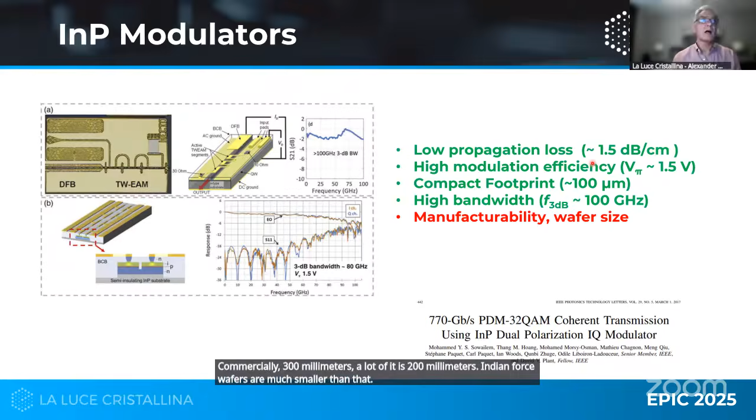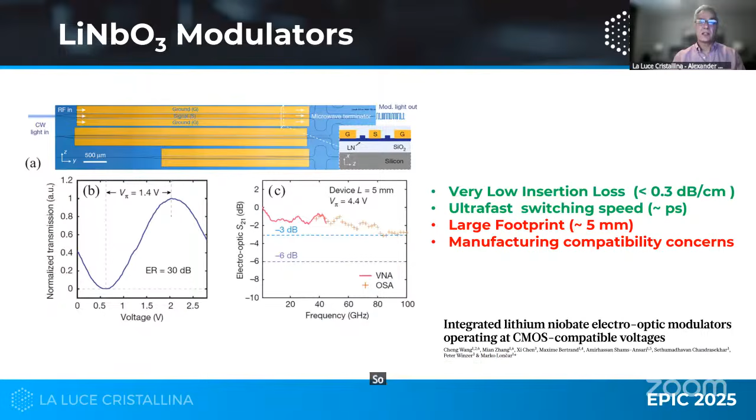Now, the issues are the devices are fairly large, and we'll talk about why. But to me the biggest concern is manufacturing compatibility. It's not so much lithium niobate, it's lithium oxide—lithium oxide is extremely volatile. At room temperature it gives significant vapor pressure, and if you bring this to a silicon fab you contaminate everything, since lithium is a known contaminant in silicon process. So it's a concern—you have to build an entire separate infrastructure.

Among all kinds of modulators, I'll focus on those which do clean phase modulation, essentially phase shifters in various forms that use the Pockels effect. I will not talk about polymers, but I'll talk about lithium niobate and barium titanate. PZT is another option, but PZT has lead, so that's a no-no.

The reason these materials are popular is because of the high data rate they offer and low energy of switching, allowing a low energy solution which is attractive for data centers.

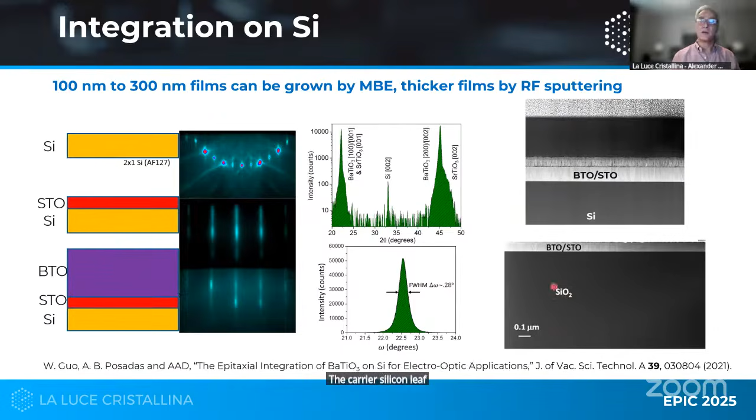And then there's a version of that where you actually don't have any silicon between the barium titanate and the box of the SOI wafer. The carrier silicon wafer below is out of the field of view. So these are thin films.

Now if you look and compare the thin films of lithium niobate and barium titanate, let's take the A-axis variety—that's the long axis in the plane. Lithium niobate gives you a single domain structure, and the data came from the Leuthold group at ETH. Barium titanate is more complicated—it has domains, it can grow in two orthogonal orientations. You see there dark green and light green; they are the same crystal structure, except the long axis is at 90 degrees.

If you look at the dielectric tensor in lithium niobate, it's extremely stable at frequency, no change. In barium titanate, there is change, so it rolls off. If you look at the electro-optic coefficient, it's quite the same thing: in lithium niobate it essentially does not change, it's a modest value here—in thin film it's below 30 for R33.

In barium titanate, being a thin film, you don't get 1,300—you get something smaller, and then it rolls off. But actually it's still large—it's still over 200 when you go to very high frequency.

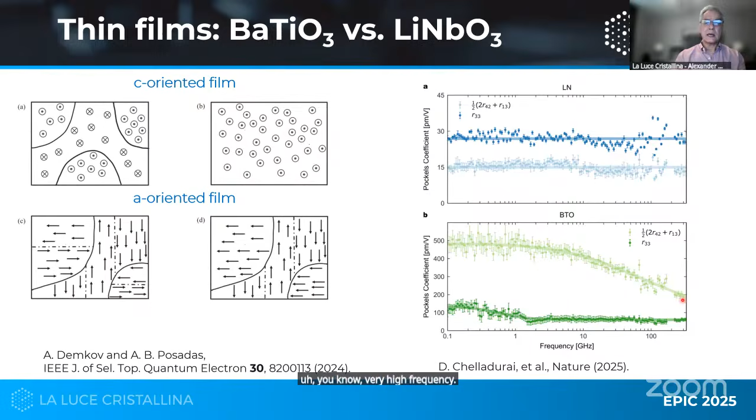Let's see what devices look like. La Luce Cristallina doesn't make devices ourselves—we collaborate. This was a collaboration with Professor Wasserman at UT Austin, and he built both ring resonators and Mach-Zehnder interferometers. So there's a picture of the Mach-Zehnder, and here's a picture of the ring resonator.

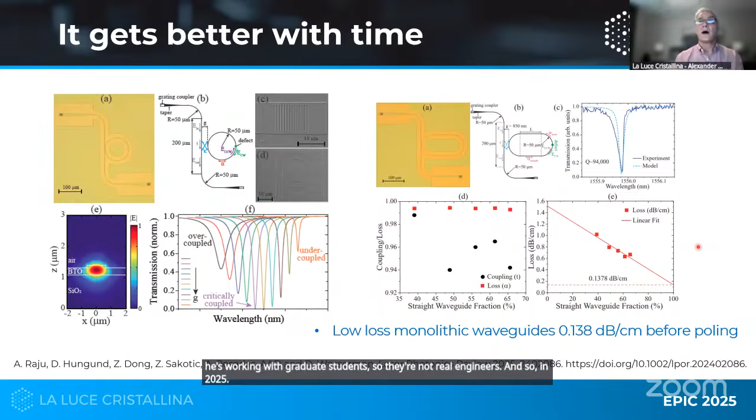They showed a fairly low loss in the waveguide—this is just a straight waveguide loss obtained by a cutback measurement right here, where you make different waveguides of different lengths and plot that. They were able to get the resonator with a Q of 10 to the 5th, which is not bad. This was 2023, but there's rapid progress—remember, he's working with graduate students, so they're not real engineers. In 2025, they used racetrack resonators, and this is the ring resonator.

They were able to extract the linear loss in the straight part of the racetrack on the order of 0.14 decibel per centimeter. This is really fantastic, and that's before poling—none of this barium titanate is poled. Lithium niobate is always poled before, at the wafer level, before you bond it to a substrate.

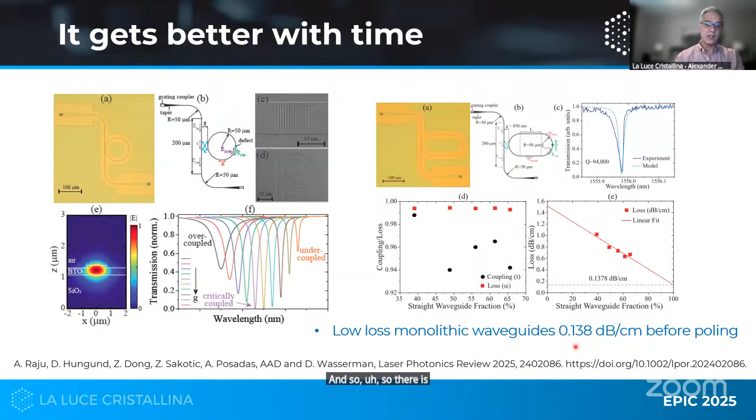So there is rapid progress. We're not the only people who work on that. This is data from IBM, and they reported Q of 10 to the 5th and loss of 0.8 decibel.

This is data from a company called Phase Sensitive. They did a very interesting experiment: they made a 3.5 centimeter long waveguide, sent light in, and waited for it to come back. So the effective travel length is 7 centimeters—not millimeters, not microns, 7 centimeters. And they measured the loss of 0.7 dB.

And then this is the work on the right from University of Illinois in Champaign-Urbana. They actually made the record Q of 1 million resonator, and they extracted the loss of 0.3.

What is behind this? If you look at the old literature, for example the old IBM papers, the loss is much, much higher, on the order of 40 dB. So what's the difference? All of this data is in the monolithic barium titanate—nobody put silicon or silicon nitride and etched that. Guiding is done in barium titanate proper, and most of them are done in barium titanate grown on large wafers.

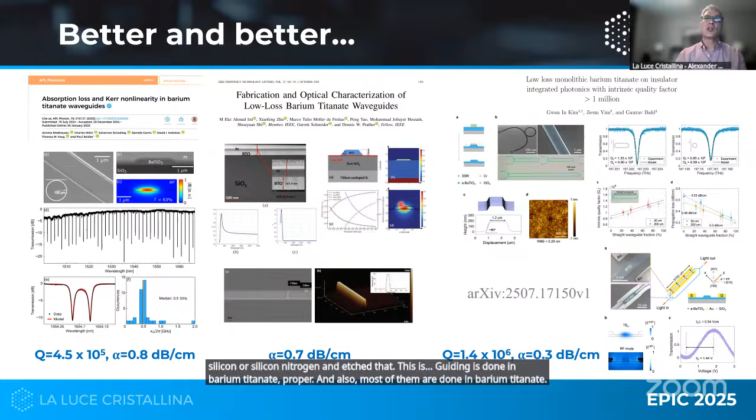And we have just started as a company manufacturing barium titanate on a 200 millimeter wafer. Probably my time is up, so I will stop here. Thank you very much for your attention, and I will be happy to answer all the questions.

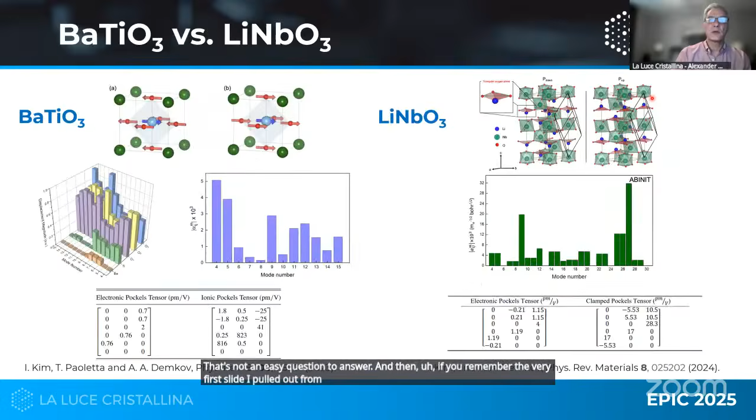If you remember the very first slide I pulled from Richard Soref's review, let me go back to it—this isn't my assessment, it's theirs. Right here you see that barium titanate is possible to integrate with CMOS; it's fully compatible with CMOS, nothing is volatile, nothing contaminates. And in terms of power and area and all of that, it's good in principle. But it's a new technology and not much is known. So what we'd like is to make friends with people who are willing to try and make devices, because most devices you hear about are probably made by universities.

So there are two companies that we're aware of. One is Lumiphase, they're working on a PIC. And then there is PsiQuantum, which is working on quantum computing. They are not publishing much data on their devices.

So we are looking for people to partner with in various forms so we can push barium titanate technology forward, because it requires processing capabilities, it requires device capabilities. And there are two ways of using the material. We think the best one is to make everything in barium titanate proper. But of course, people already have working architecture, so you want to use barium titanate in the area on the chip where you want it.

And for that, you can either do wafer-to-wafer bonding or die-to-wafer bonding. So we're looking for partners in that, and we hope that we can find these partners in the EPIC ecosphere.

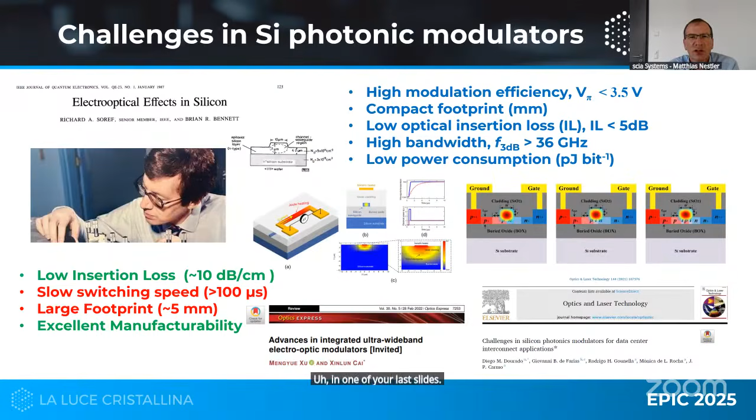Yes, hello. Alex, thank you for the nice overview of the new material, it's very exciting. In one of your last slides, you showed the position of barium titanate on a 300 millimeter wafer, and you mentioned an excellent uniformity of 3%. My question is, is there an advantage if you would further decrease this value to lower than 3%, for device yield or any other properties?

Well, certainly. I mean, silicon wafers proper have probably higher uniformity than this. So I think what happens essentially, if you look at this wafer, it's slightly different color at the edge and in the center, so there's some kind of radial distribution. Also, you can see that the center is somewhat different from the edges. So of course it will benefit, but this must be good enough.

My understanding is, personally, I do not see the number of PICs which require 300 millimeter wafers. But I believe it is co-packaged optics, TSMC, and they work on 300 millimeter wafers, which pushes people to that size. I think that if you start working on that with very few wafers, you will saturate. We are on the order of 10 million PICs, which are 10 millimeters square. So you can calculate how many wafers you would need. So I don't think there is a market for this size of wafers. But the technology, the 300 millimeter facility, silicon facility, like PsiQuantum works with Global Foundries, and I think that's what drives this size.

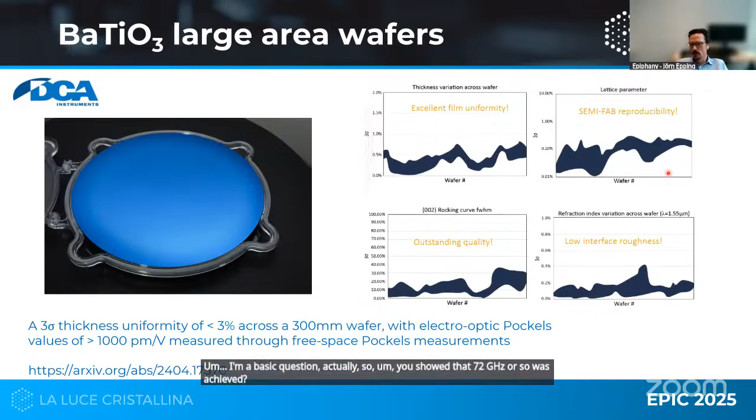Epiphany, please. Hi, thanks. So we're a design house, right, we design for photonic chips. And my basic question actually is, so you showed that 72 gigahertz or so was achieved, I saw. The question would be, what is the limiting factor there? So if the Pockels factor is so much higher, why not? How far can you push it, and what's limiting it, right?

Well, so this is my sort of anecdotal evidence. It is very expensive to go to high frequencies, right? So, let's see, how does it go. If you want to stay below 40 gigahertz, the VNA system you need to buy is on the order of $150,000. If you go to, let's say, 200 gigahertz, you are already in several hundred thousand dollars, and then it becomes more expensive than the ultra high vacuum deposition system. So there are very few people who can do material testing at this level.

I think it will work to terahertz, because you'll of course diminish the response, since the lattice cannot respond above probably 6 terahertz, so you'll be at half value at best. And then of course there is, in this paper they talked about absorption losses. This, however, I think is because IBM uses a slightly different way of depositing, they use molecular beam epitaxy, so there are some absorptive centers there. We use RF sputtering, so I think that absorption is not an issue. They thought that Q 10 to the 6 is the limit. I don't think it's the limit, I think you can make a better material.

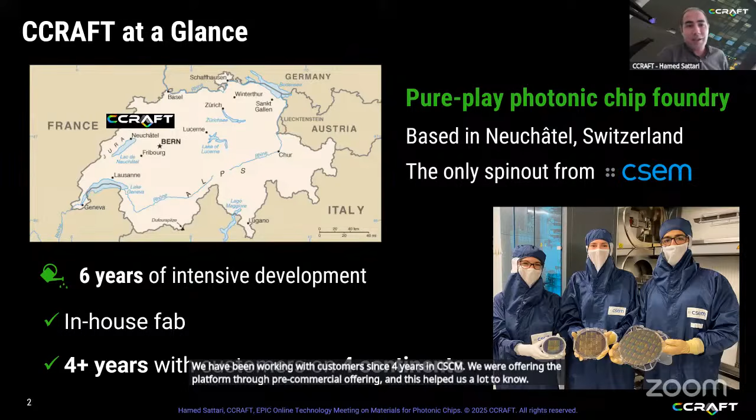This is quite important because we have full control over our recipes, which matters for the IP and also brings flexibility. We have been working with customers for 4 years at CSEM, offering the platform through pre-commercial offering, and this helped us a lot to know the customer's pain points and how we can add value to their products.

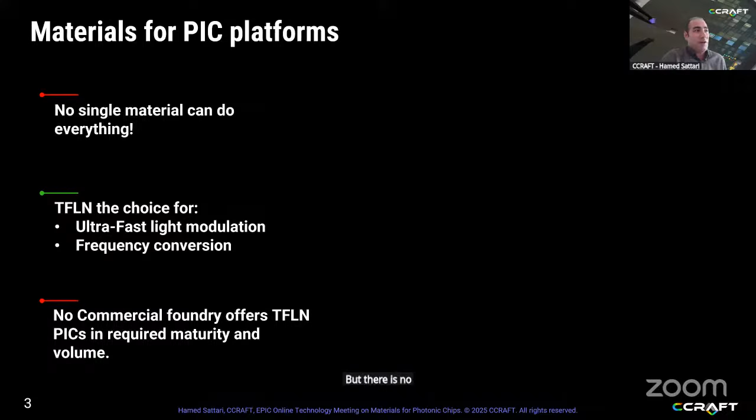It is clear that one material cannot handle all the operations needed for photonics, but basically TFLN is chosen for ultra-fast modulation and maybe frequency conversion. Today the focus is basically in datacom and telecommunication markets, that's why high bandwidth operation of lithium niobate is really in focus. But there is no commercial foundry offering TFLN in the volume and reliability required for industry.

Briefly, if you compare lithium niobate with mainstream PIC materials, you see that for modulation, TFLN seems to be the option to choose. At CCRAFT, we focus on further maturing the technology and bringing access to a broader ecosystem to adopt this technology.

If you look at the value chain for photonic integrated circuits, reliable manufacturing at high volume is the missing block that brings the bigger value to the chain. It's not like semiconductors, where fabless companies and design houses bring the biggest value. TFLN stands in a unique position because that's already recognized by industry, thanks to the experience of industry working with bulk lithium niobate.

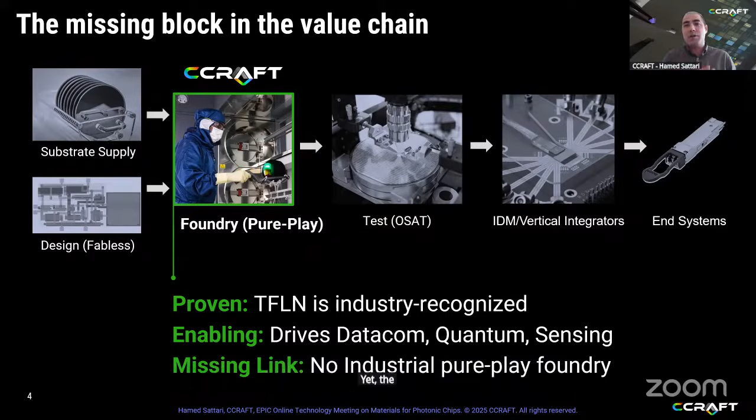With TFLN players, we believe that this is the best material for photonics because its options go beyond datacom and telecommunication, it's an enabler for quantum, optical computation, advanced sensing, and so on. Yet the missing block is industrial grade manufacturing, and with CCRAFT we are closing this gap.

When we talk about thin film lithium niobate, Alex nicely covered that it's a quite unique material, hard to etch and pattern, and you need a dedicated facility for that. This is one of the barriers to taking lithium niobate to a standard CMOS foundry. We did this - from day one we have been working in an industrial environment.

You don't need a big fab because the market demand, you see, TFLN is still a niche inside a niche market. From day one we developed a technology that today is the most advanced in the world, I'm talking about the number of technology steps.

We don't only etch one waveguide, we etch lithium niobate in different levels. We have several metallization layers, we protect this with cladding, and we nicely open this cladding in different levels for integration and advanced circuitry, all in an industrial environment. And it's not only fabrication, that is also protected by a de-risked PDK - not only simulation, but also manufacturing and testing in more than 10 cycles has happened.

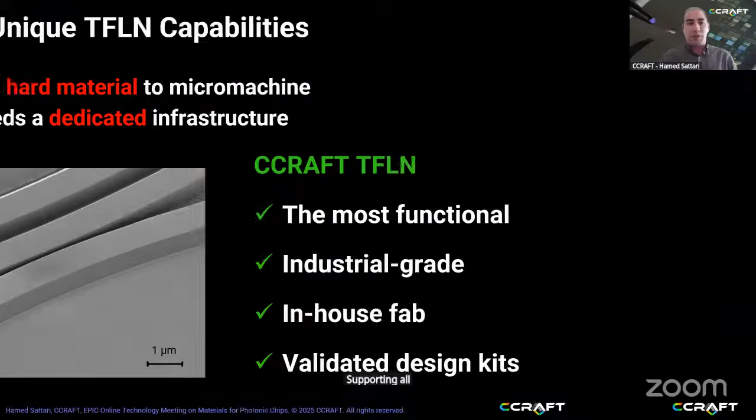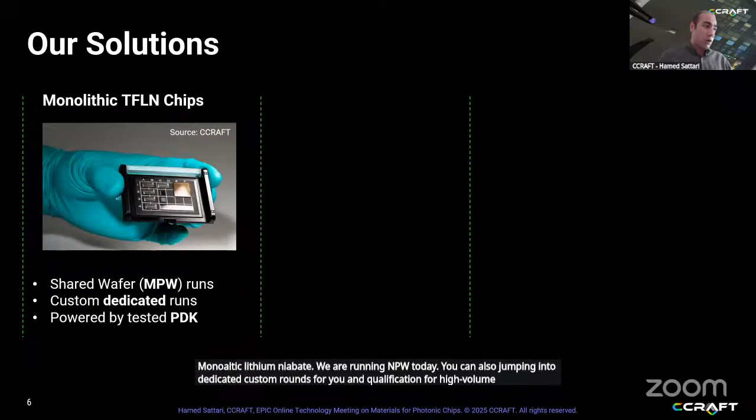We provide customers with measurement data supporting all individual building blocks. In terms of solutions, we provide different options based on our foundry processes. First, monolithic lithium niobate - we are running MPW runs. You can also jump into dedicated custom runs and qualification for high volume runs, all empowered by tested PDK.

But silicon photonics needs to get enhanced immediately. One option would be microtransfer printing - you need a supplier for thin film lithium niobate chiplets to take those chiplets and put on your silicon photonics. We have developed a nice recipe with high yield. We deliver wafers with tens of thousands of chiplets ready for your silicon platform. We are ready to engage with people today.

On top of that, we are substrate agnostic. If you somehow bond your lithium niobate dies or wafers on your silicon photonics, we are here to continue from there - processing lithium niobate, back-end of line processing, metallization, and so on. We tested a few of our recipes for TFLN on TFLT, and the result turned out to be amazing. We see some traction on TFLT, and we do internal development to also offer TFLT in the near future.

From customer interaction, we see that they like to have monitoring photodiodes in the platform. This is something that at research level, we have practiced several times with amazing results. We are thinking to integrate photodiodes also in our platform in upcoming years - I'm talking about the short future.

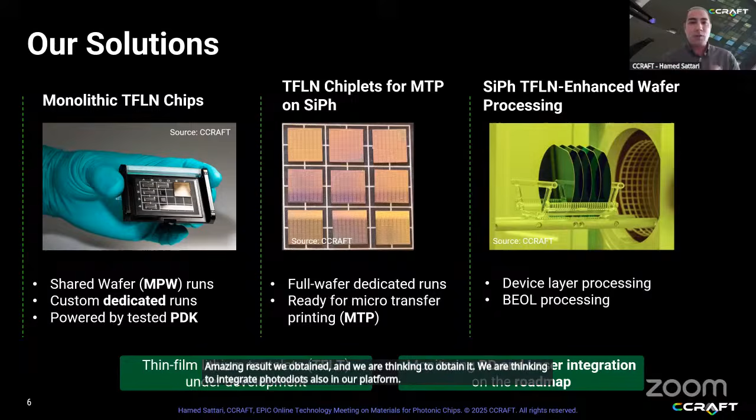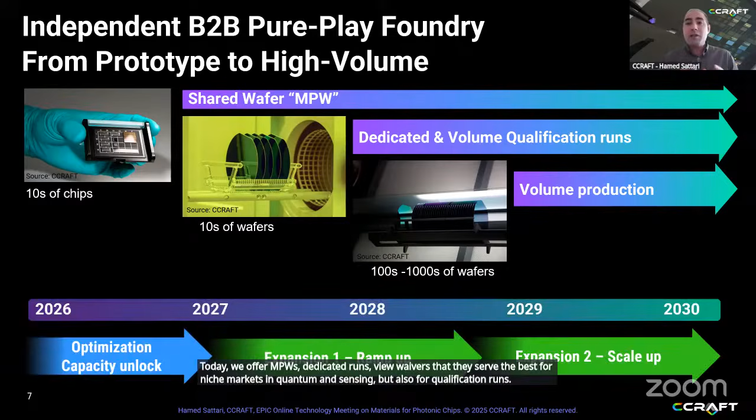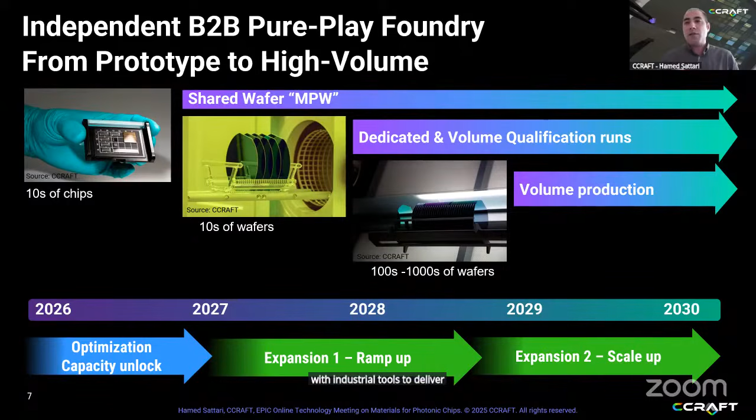Today, we offer MPWs, dedicated runs, few wafers that serve best for niche markets in quantum and sensing, but also for qualification runs. We already unlocked the capacity required for high volume production from our certified foundry at CSEM in Neuchâtel, and in different phases we are expanding our fab in the region. We have secured the clean room area. Now we are populating it with industrial tools to deliver 20,000 wafers per year in the next 3 to 4 years.

So with this slide, I was thinking about what are the options for TFLN technology, from monolithic to heterogeneous - what's their status, pros and cons. Please note that this is just personal perspective from Hamed Sattari. There are several points that you might agree or disagree with - that is food for thought and discussion.

Option 1, monolithic TFLN. Status: clear, very strong momentum because of clear reasons and the AI revolution. Pros: there have been several years of research behind thin film lithium niobate, several papers that Alex showed, nice bandwidths, low insertion loss, and compatibility with the value chain. If you complete this foundry part of the value chain, whatever works for silicon photonics will also work for TFLN in terms of integration.

Cons: lack of reliable manufacturing at volume. And there is a big question - what's the meaning of volume here? It needs a bit further thinking. We enter the heterogeneous or hybrid domain - whatever word you pick doesn't really matter.

Option 2 is TFLN on silicon photonics using microtransfer printing. From my perspective, it sounds interesting, but it seems that industry still lacks a bit of confidence to adopt it. Pros: you are really flexible in terms of where to place these components, and it might also bring some cost advantages.

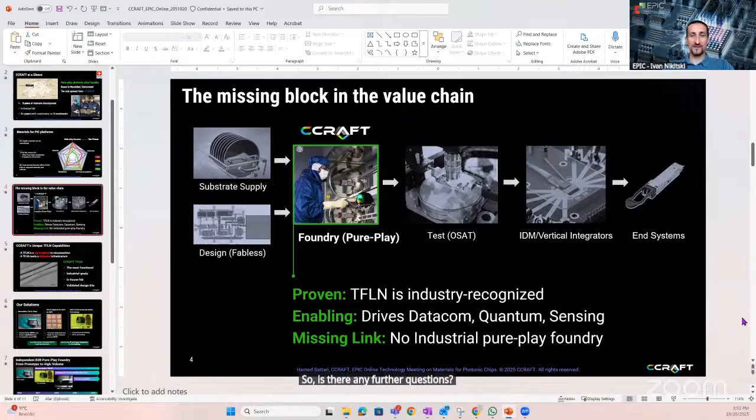Yeah, indeed, the perspective is wonderful. So I wish you all the best with these developments, and I hope there will be an interesting follow-up coming from this meeting for you as well. So is there any further questions? If not, we thank Hamed again, and we switch to our next speaker, who represents Aluvia, and this is Carlos Osornio Martinez, the integration photonics engineer, who will talk about revolutionizing photonic integrated circuits with aluminum oxide technology.

Welcome, Carlos. Yes, thank you, Ivan. Thanks for the introduction, and thanks to the previous speakers also for the very nice presentations. I'm very happy to present today how we can revolutionize photonic integrated circuits using the aluminum oxide technology of Aluvia Photonics.

So I will start briefly giving a company overview. Aluvia Photonics was founded in mid-2022 as a spin-off of the University of Twente in the Netherlands. We are basically a PIC manufacturer, providing photonic integrated circuits based on the aluminum oxide platform to our customers. Right now we are a very small team, five people.

Currently we are working with 4-inch wafers, with fabrication performed at the clean room facilities of the University of Twente, which you see in this picture, the Mesa Plus Nano Lab. However, for the future, we're already exploring with tier 1 CMOS foundries for developing our process in 8-inch wafers, so that we can deliver volume for the applications that need them.

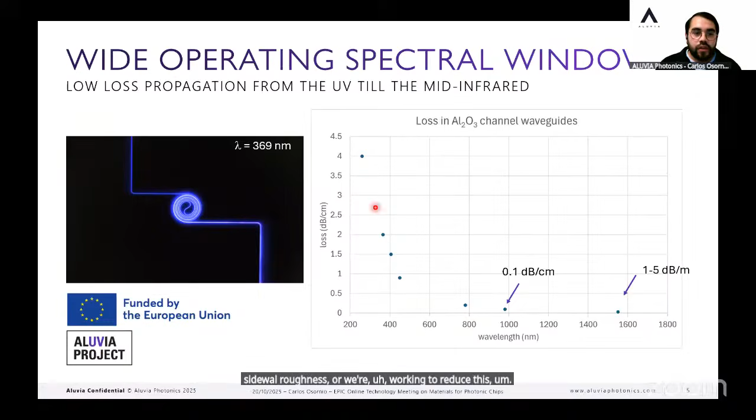Another advantage of our material platform is that it is very linear and handles a lot of power. We have observed four-wave mixing only when we have around 50 watts continuous wave inside the ring. The nonlinear index is comparable to silicon dioxide, meaning it's basically a very linear material with high power handling, which for telecom applications is suitable to ensure signal integrity.

As I was mentioning before, we can dope our material with rare earth ions. It is very soluble, meaning you can put a lot of ions and it will dissolve well into the matrix.

In this slide, I present a demonstrator that we had also in collaboration with PICs, an erbium doped waveguide amplifier. This is a 50 centimeter long spiral, and with this device we demonstrated almost 25 dB fiber to fiber gain in the small signal, with an output power at the fiber above 50 milliwatts. Noise figure was around 6 dB at 1550, specs comparable to the erbium doped fiber amplifier, but the advantage here is that we have reduced size and reduced cost as well.

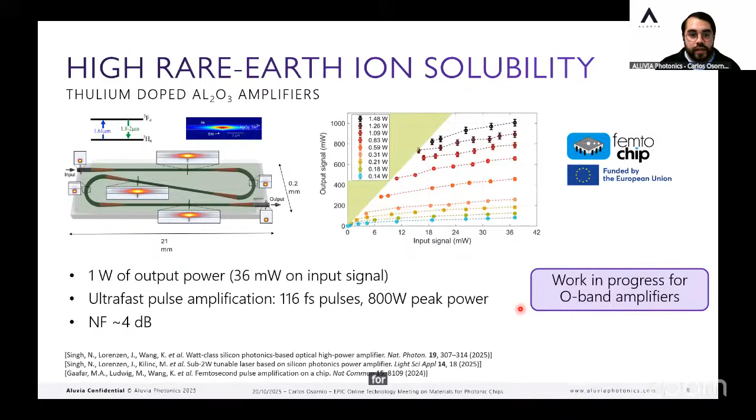We're currently working on developing amplifiers in the O band, which are very important now for AI and data centers. This slide summarizes the EDWA technology. With Aluvia's platform, we can deliver the performance of erbium doped fiber amplifiers, but with the size and scaling of semiconductor optical amplifiers.

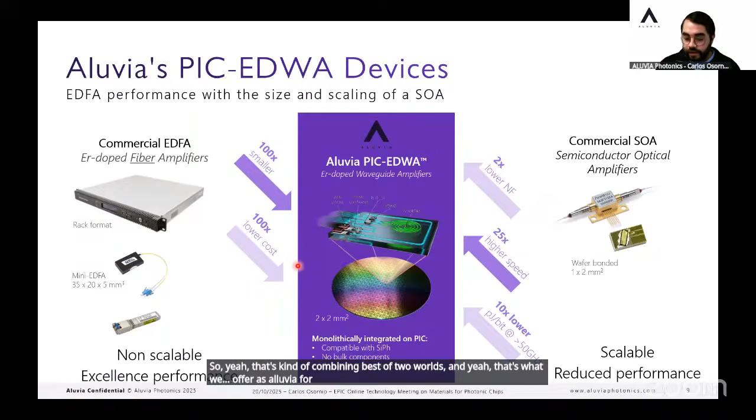That's combining the best of two worlds, and that's what we offer as Aluvia for amplifiers. With that, I would like to thank you for your attention, and I will be happy to take any questions that you might have.

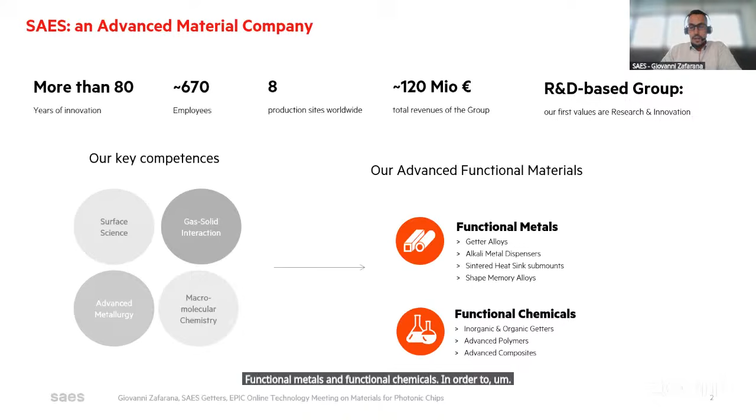SAES Getters is an advanced materials company focused on R&D. We provide many products based on functional metals and functional chemicals in order to upgrade and solve problems or troubleshoot inside devices. Our market areas cover different technologies like optoelectronics, photonic devices and sensors, and we provide products like functional coatings, barriers, or dispensable getters in order to trap gas contaminants like water, hydrogen, and many other molecules that can reduce the performance of the devices.

If we focus attention on optoelectronic hermetic packaging, in particular laser diodes, laser modules, transmitters, optical fibers, and many other devices, sometimes contaminants like moisture, hydrogen, or other organic compounds may degrade or reduce the performance of the devices in terms of oxidation, corrosion, and other chemical reactions that can cause signal attenuation, shifting, or cracking, considering that inside the devices there are polymeric resins or other components. We point attention to the acceptable level, set at 5,000 ppm for water and 1,000 ppm for hydrogen. So it's important to clean the inside of the device package, reducing the amount of water, hydrogen, and other compounds.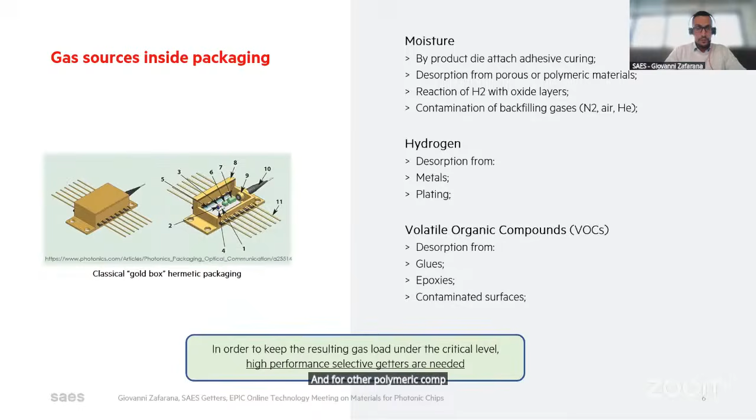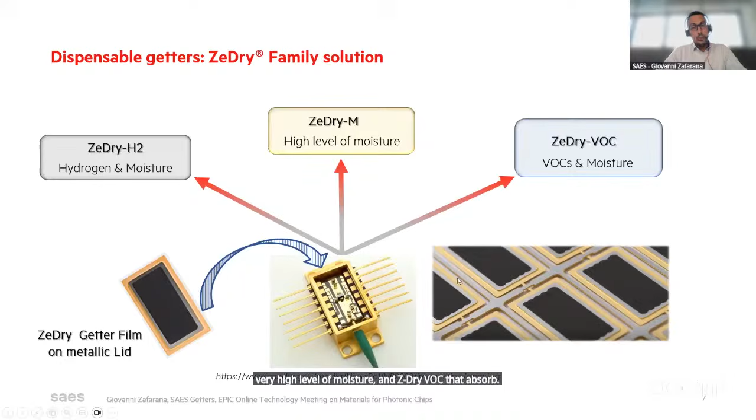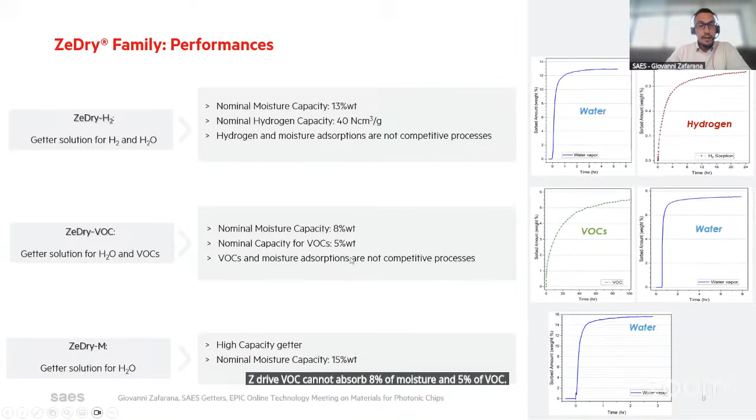So SAES Getters' solutions are reported here. We have three products: ZeDry-H2, which absorbs hydrogen and moisture; ZeDry-M, which absorbs a very high level of moisture; and ZeDry-VOC, which absorbs both VOC and moisture. ZeDry-H2 can absorb up to 13% of nominal moisture capacity and up to 40 cubic centimeters per gram of nominal hydrogen, and the hydrogen and moisture absorption are not competitive. ZeDry-VOC can absorb 8% moisture and 5% VOC, and ZeDry-M can absorb up to 15% water.

In our laboratory, we perform tests to understand the adsorption performance, in particular changing the temperature of the devices. We found that increasing the temperature from room temperature up to 120 Celsius, the adsorption still remained at 50% effectiveness. So the question is, what is the remaining water inside the package? For that, we are performing the isotherm of water to understand, with increasing temperature, what humidity still remains inside the packages.

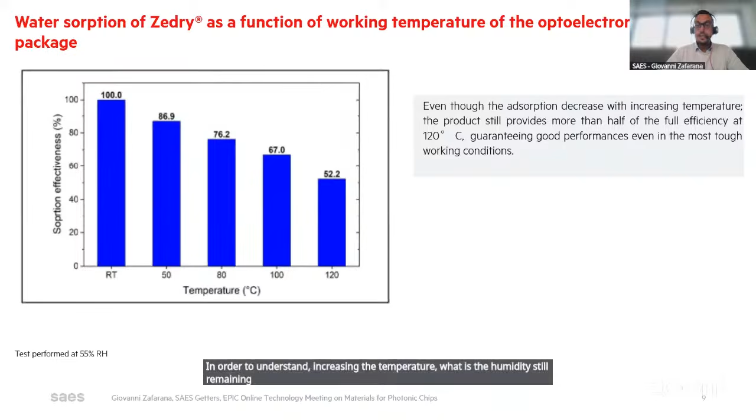Another feature of our products is the reducing of the reflectivity. For that, we perform tests with a laser, setting the input power at 20 milliwatt with a solid angle incidence of 45 degrees, and we measure the reflectivity with a blank sample versus our ZeDry-M black version. You can see that the reflectivity dropped down from 50% to 0.15%. This highlights that we can reduce the scatter light and stray light inside the device system and packages.

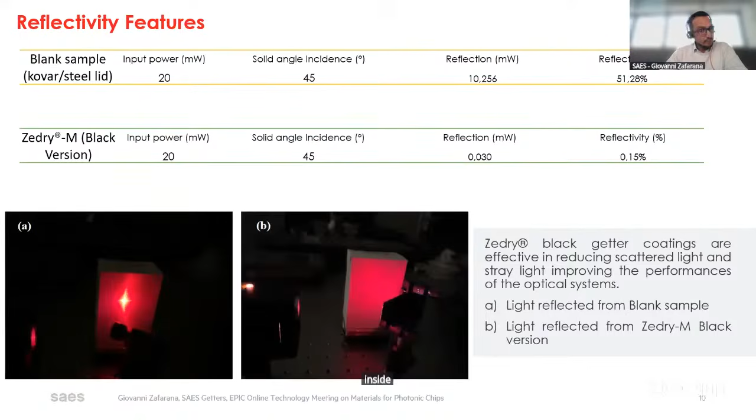Another feature, in this case with our ZeDry-VOC product, is the difference in absorption depending on the chemical nature of the organic compounds that can be desorbed from polymeric materials inside the devices. In particular, we perform tests with compounds like ethanol or methyl ethyl ketone, and we measure the uptake of these different organic compounds with the ZeDry-VOC. This depends on the chemistry, the chemical-physical affinity of the compounds with our polymeric resin that our products are made of.

Another issue for our products is the environment of activation. If you use the standard activation, in particular using vacuum down to 10^-5 millibar and 120 Celsius, we can ensure that the absorption of organic compounds reaches maximum uptake, compared to other activation conditions, for example air or nitrogen. So standard curing with a high vacuum can ensure good quality of absorption.

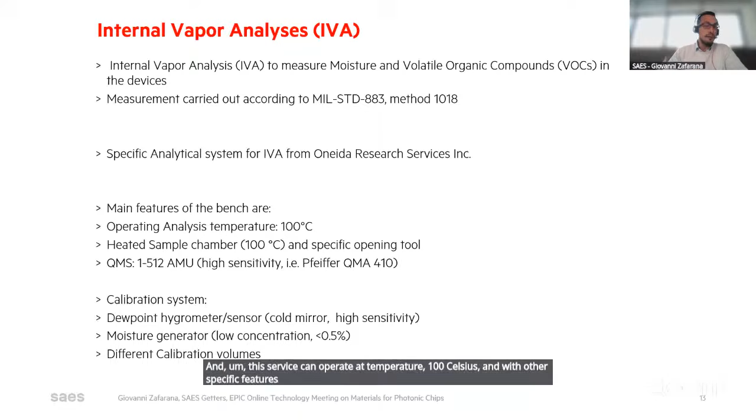We also use in our laboratory a specific analytical system from Oneida Research Services, which can operate at 100 Celsius with other specific features like the quadrupole. With this system, we operate with dummy devices to understand the amount of water remaining in packages that have the ZeDry-M. With a non-optimized process, the amount of water is around 1,000 to 2,000 ppm. But if we improve the degassing process and activate our product properly, the amount of water remaining inside the packages drops below 5 ppm.

So it's important not only to use our getter inside the package, but also to activate it properly in order to reduce the quantity of moisture inside the devices. The hermetic package can suffer from gases inside the devices, and our film integration ZeDry family products can improve and drop down the amount of gas contaminants. Tailored getter materials can be integrated to improve these performances - not only absorption is important, but also the temperature of the devices, radiation absorption, reflectivity, and organic compounds.

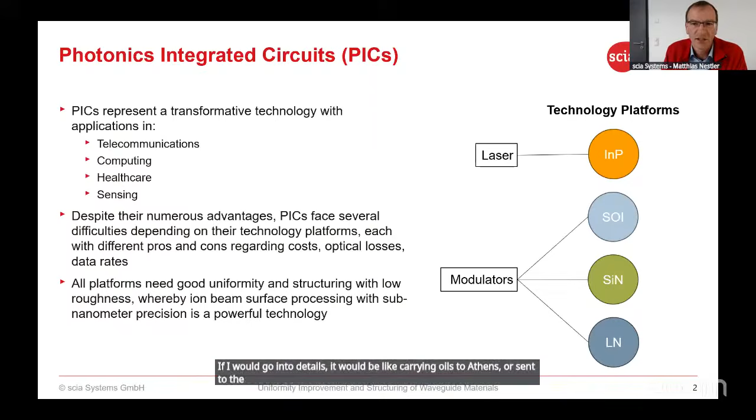I think I can skip this slide since everyone here in the audience knows what we are talking about: photonics integrated circuits. If I would go into details, it would be like carrying owls to Athens or sand to the beach. So I'll skip this, but allow me to give some first words on SCIA Systems.

SCIA Systems is a specialist in thin film process equipment manufacturing. This equipment is typically based, in our case, on ion beam processing technology and plasma processing technology. We have customers worldwide, and we have existed for 12 years. We are based in Germany, in Chemnitz, and we had a revenue of about 100 million last year.

Our main markets are in MEMS, especially in the RF filter manufacturing business for mobile communication. We have markets in augmented reality and in high-end optics, where works like EUV lithography optics come into the game. And we look into this new topic of photonics integrated circuits as well. We have a global sales and service network, and we do a lot of technology and process development in-house, so we don't only sell equipment, we sell complete solutions to the customer.

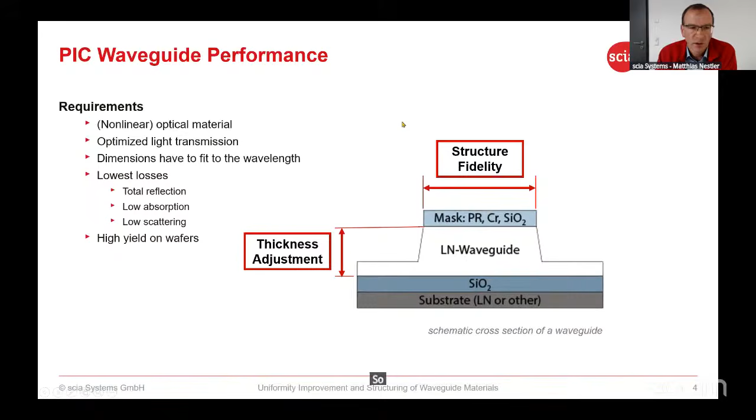What we are talking about is photonics integrated waveguides. The performance of such waveguides typically depends on some properties and requirements. We have special materials, nonlinear optical materials like lithium niobate, aluminum nitride, or aluminum oxide—all these names already were mentioned. We need to optimize the light transmission in such waveguide material, and we need to take care of the dimensions that have to fit the wavelengths we want to transport over that waveguide. That brings me to topics like lowest losses for total reflection, lowest absorption, low scattering, and of course high yield on wafers.

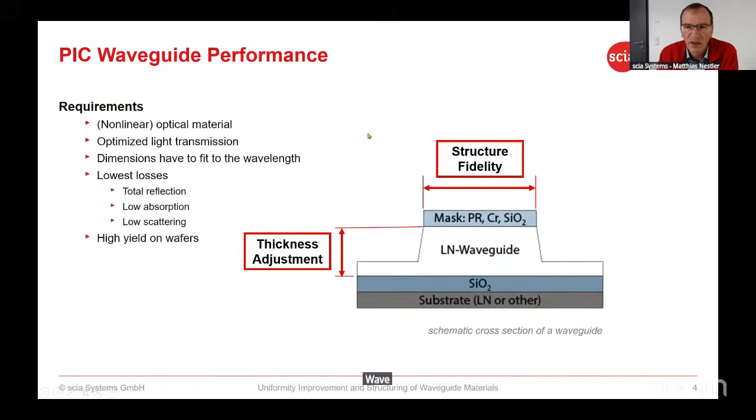So I have highlighted here two main parameters we are able to control: one is the thickness of such waveguides, and the other one is the structure fidelity. First, I want to switch to the ion beam trimming technology that addresses the thickness adjustment.

A short introduction on the principle of ion beam trimming: imagine you have a wafer, let's say a 200 millimeter wafer, with a certain film on it, and the film has a thickness variation.

The thickness variation can be pretty low. Here in the example, you have a variation from 368 to 360 nanometers, so just 8 nanometers variation. Sounds pretty smooth, but nevertheless, it may not be sufficient for your application.

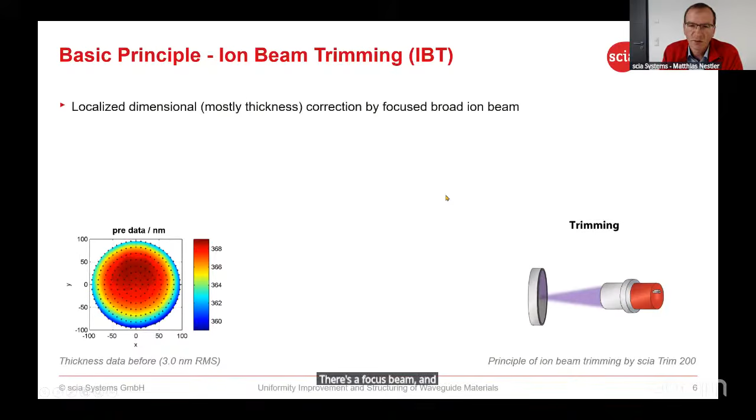Therefore, we developed the technology called ion beam trimming. In the schematics, you move a wafer in front of an ion beam source with a focus beam, a broad beam ion source, and you remove material at certain positions. It's a contactless high vacuum process with a very good depth resolution, close to single atom layers. The removal is controlled by local dwell time of the ion beam at a certain wafer position, and the dwell time adjustment is pre-calculated and then transferred into a velocity map for this raster scanning.

We can also tilt our substrate to a certain angle to achieve certain improvements. And finally, what you want to achieve is a very uniform film thickness distribution or property distribution of your devices, if you already have devices on that.

Like shown here on the right picture, we improved the variation from 3 nanometer RMS down to 0.13 nanometer RMS by this ion beam trimming technology. This is one nice example.

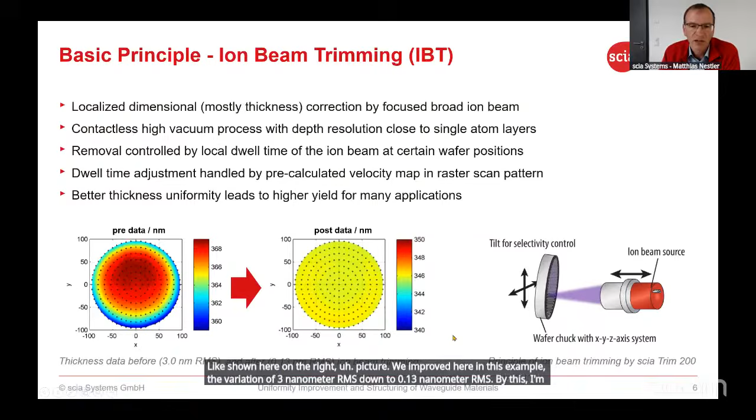This can also be applied to waveguides. For instance, for lithium niobate waveguide trimming, here you do this trimming before you structure the waveguide, so just the bare film material is trimmed to a certain uniformity.

This can be applied for POI wafers, so lithium niobate or lithium tantalate on silicon, for silicon nitride films, for silicon oxide films, or silicon films on silicon oxide or SOI wafers. All these materials can be trimmed. Even other materials are trimmable with that principle. We achieve uniformities of 0.1% and better.

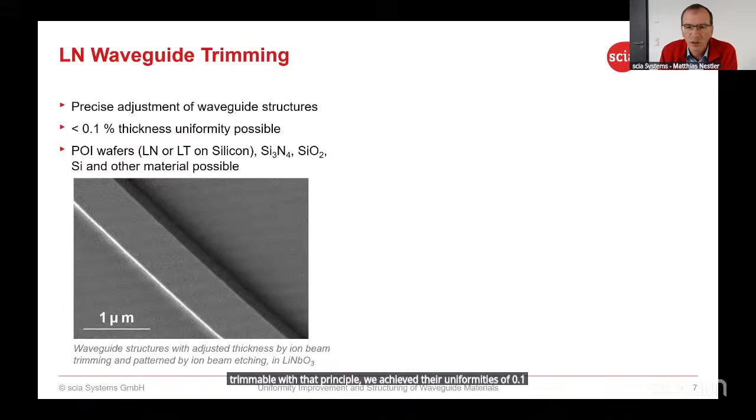Here are some nice examples. Just need to switch it. Nice examples of lithium niobate trimming.

So you see the pre-data in the left picture with some variation in the thickness, with a standard deviation of 3.84 nanometer, and this could be trimmed down to 1.32 nanometer standard deviation with our ion beam trimming process.

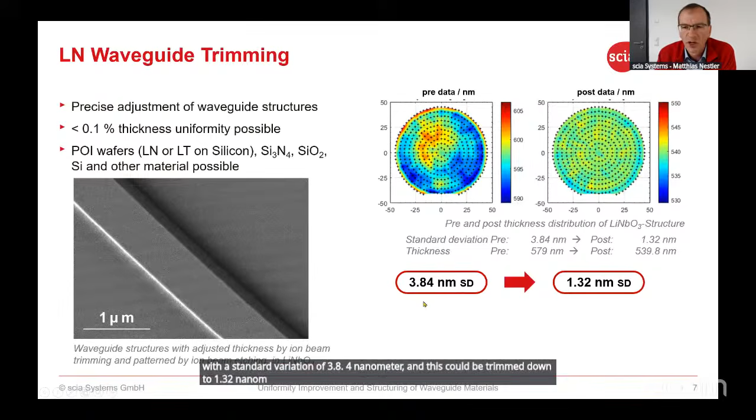Also, silicon nitride is a material that can be trimmed. Here's an example of a silicon nitride film of 435 nanometers average on a 2.5 micron silicon oxide film on a wafer. Here, even the pre and post data comparison.

To make it more visible, I have put here also a histogram. So you see in the dark blue distribution, the variation of the thickness over a wide range of 425 to 440 nanometers, while after our ion beam trimming, all the measurement spots are close to the 400 nanometer target thickness.

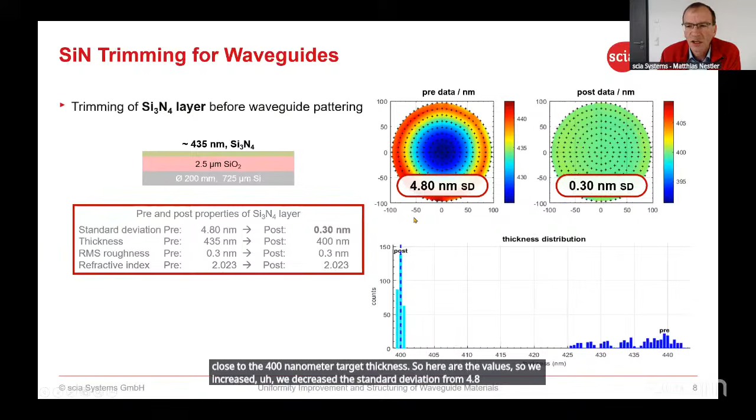So here are the values. We decreased the standard deviation from 4.8 nanometer down to 0.3 nanometer, really atomistic level, what we achieved.

And I also like to mention here two other properties, like the RMS roughness, where we did not see any negative effect, so the roughness pre and post processing stayed the same at 0.3 nanometer. And also the refractive index of that material, the silicon nitride, stayed the same at a refractive index of 2.023, post and pre is the same.

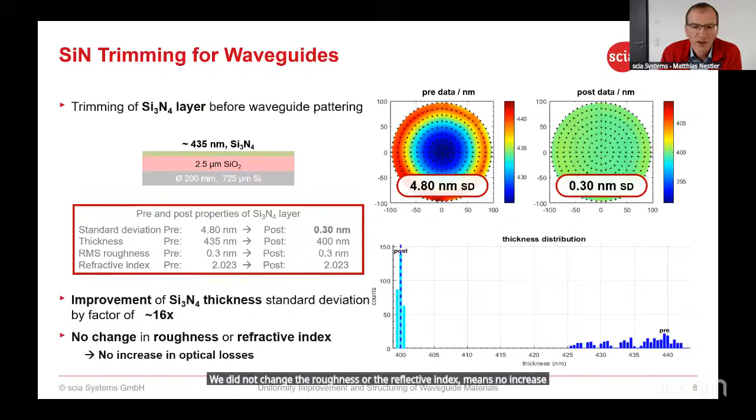So we achieved the improvement of the silicon nitride thickness standard deviation by a factor of 16. We did not change the roughness or the refractive index, meaning no increase in optical losses. And we have also achieved losses in the range of 0.14 dB per centimeter in some customer applications, but I cannot show any more detail on this.

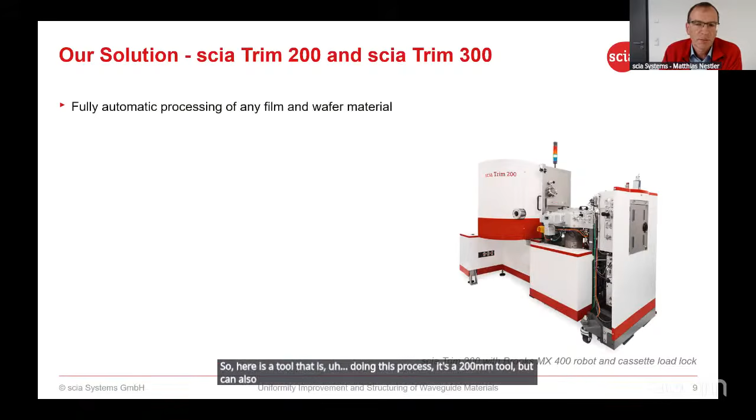So here is a tool that is doing this process. It's a 200 millimeter tool, but can also be upgraded to a 300 millimeter tool with fully automatic processing of any film and wafer material. The film thickness correction could be down to 0.1 nanometer RMS.

Typically, the processing takes a few minutes. Wafer size up to 300 millimeter. I mentioned already no edge exclusion since we have an electrostatic chuck that exposes the full wafer surface to the process. With that, you can achieve a significant yield improvement, and a throughput optimized design with two process chambers is also available for high throughput manufacturing demands.

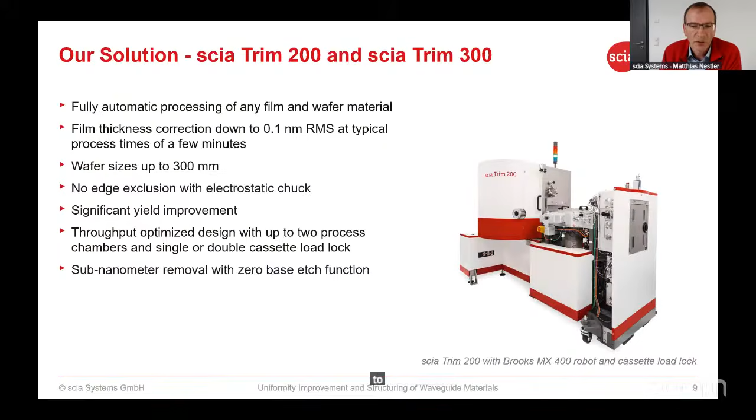But we also have R&D versions. We can also apply the technology called zero base etch function to achieve also very, very low corrections with high precision.

Then I switch over to our second property we will address with our ion beam technology, the structure fidelity. The structure fidelity, or the structuring itself, is addressed by ion beam etching. Ion beam etching is similar to the trimming, but here we irradiate the full wafer at once with an ion beam source.

We call it ion beam milling or ion beam etching when we just apply noble gas in the ion beam source, so we hit the surface with noble gas ions like argon. But we can also apply reactive gas in such a process, then we call it reactive ion beam etching, so we increase the etch rate and some selectivity. Further improvements can be achieved by so-called chemically assisted ion beam etching, which is a mix of noble ion irradiation plus a chemical substance that is fed close to the substrate, to the surface.

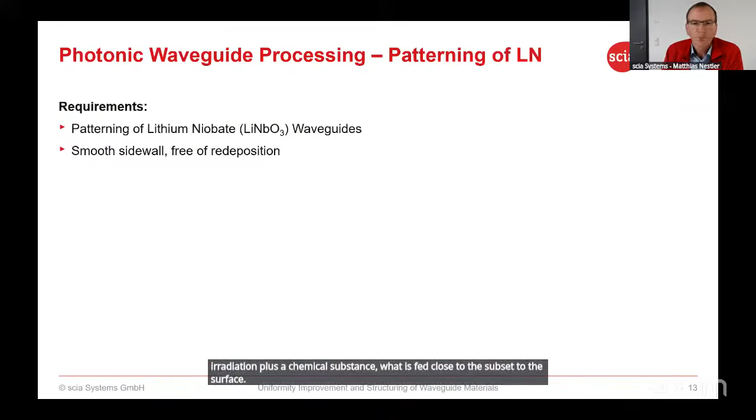For patterning of, for instance, lithium niobate waveguides, we have some requirements like smooth sidewalls, and the sidewalls should be free of redeposition. Therefore, we have a two-step approach. In the first step, we etch perpendicular, meaning we etch from the top through our mask into the lithium niobate and create the waveguide while we rotate the substrate, the wafer.

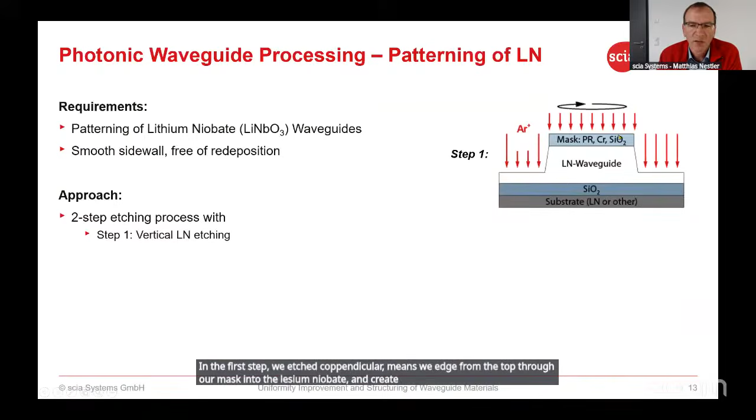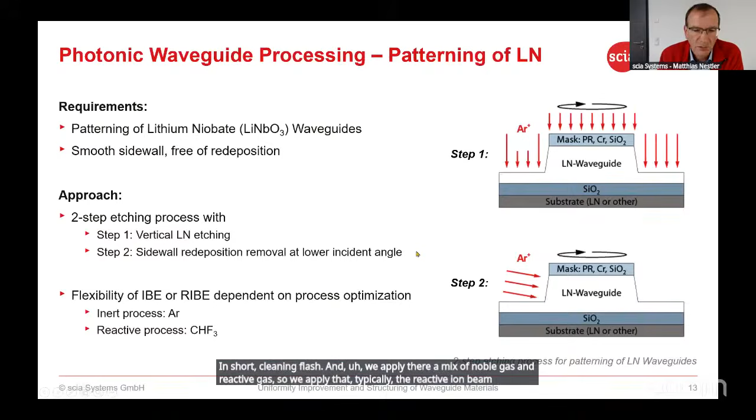Then for keeping the sidewalls clean, we tilt the wafer to a certain angle of, let's say, 70 degrees, and then we hit this side of the structure with an argon beam to clean it up, at different times. So the first step is a long etching process, while the second one is just a short cleaning flash. We apply there a mix of noble gas and reactive gas, typically the reactive ion beam etching process flow with CHF3 as a reactive process gas.

Here are some examples of what can be achieved, or what can happen also. We see here a waveguide that should be structured through a photoresist mask with a requirement of 75-degree sidewall angle or larger, with low sidewall roughness and no redeposition. But the challenge here was that the photoresist was thermally unstable, so the mask reflows and shrinks, which you can see in this SEM photograph, that the mask doesn't look pretty well.

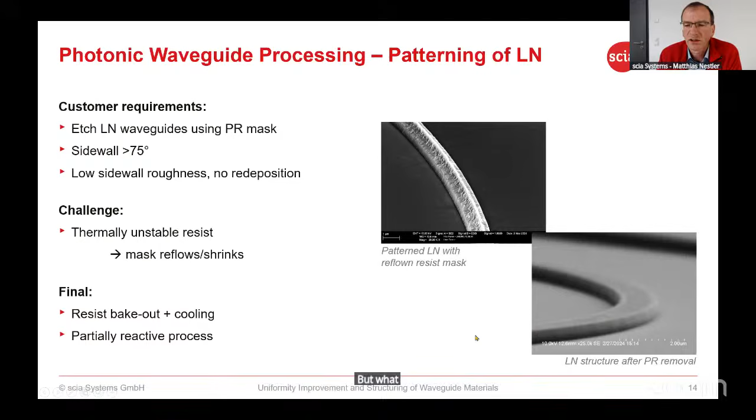We developed a process combining resist bake out plus a very improved cooling during the processing and a partially reactive process, and achieved a nice etching of a lithium niobate structure, which you can see here in the SEM picture on the lower right side.

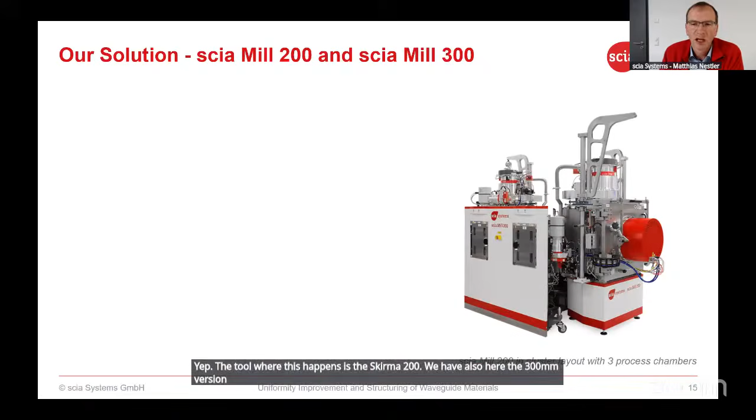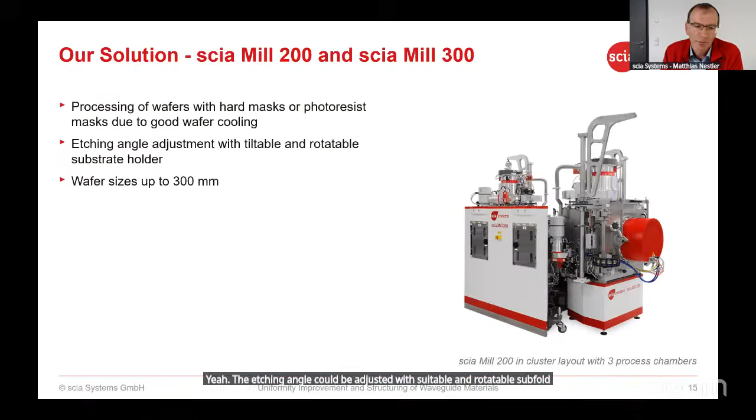The tool where this happens is the scia Mill 200. We also have the 300 millimeter version available. You see here the picture of the version with 3 process modules and 2 load locks, so high volume manufacturing ready. We can process wafers with photoresist masks or hard masks. We have good cooling, and the etching angle could be adjusted with tiltable and rotatable substrate holder, as mentioned before, up to 300 millimeter. We also optimized the system for high throughput with that robot system and multiple modules. And we have versions as a flexible tool for R&D and startup companies with just a single load lock available.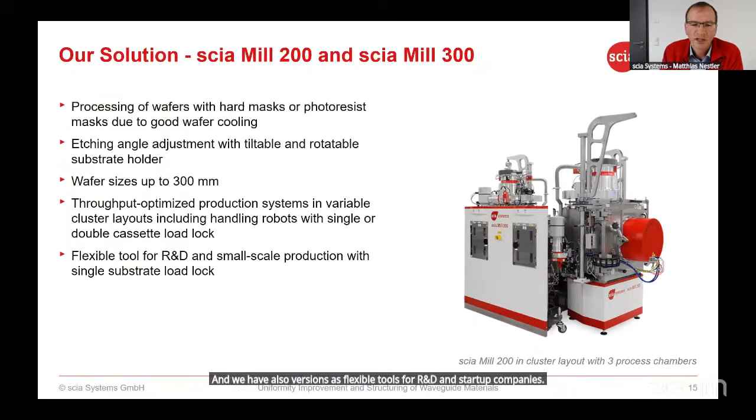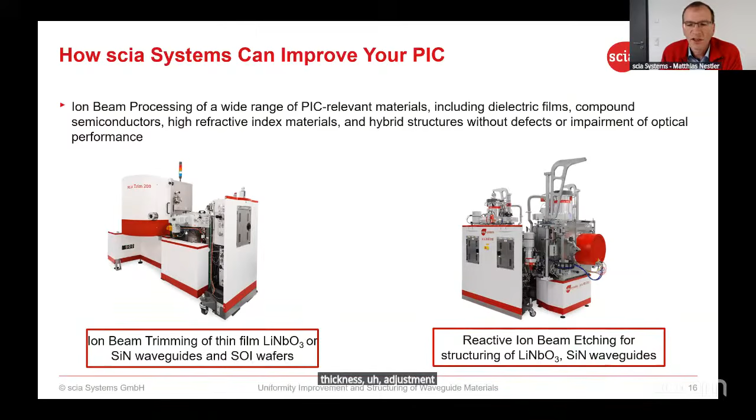This brings me to the summary. Here is a comparison of these two technologies once again. On the left-hand side, the ion beam trimming for thickness adjustment, and on the right-hand side, the reactive ion beam etching for structuring this material.

And with that, I'd like to thank you.

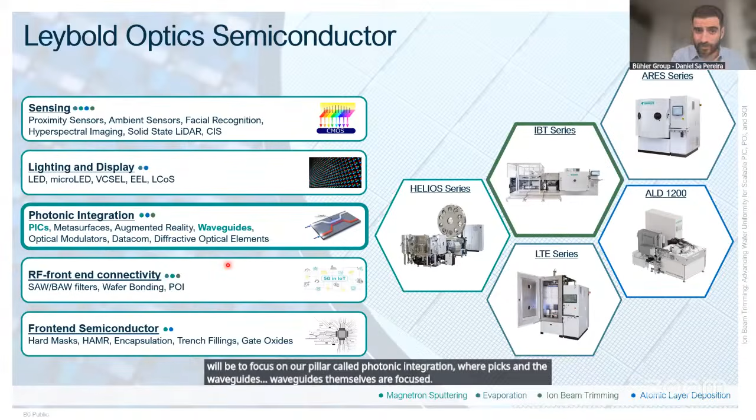We are within the semiconductor group. We have magnetron sputtering tools, evaporation tools, ion beam trimming tools, and also ALD tools. We are focusing on different types of applications, but today the idea will be to focus on our pillar called photonic integration, where PICs and the waveguides themselves are focused, mainly talking about our IBT, or ion beam trimming tool.

So Matthias made a very nice explanation of how the ion beam trimming tool works, and this is basically a very similar concept to what we have in our IBT. We generally have two tools, the IBT 200 and the IBT 300, for wafers up to 200 and 300 millimeter respectively. These tools are also dedicated for full fab integration with connection from SMIF and FOUPs, and they have installed a highly advanced ion source, which can then do the planarizing and structurizing of the wafers on a nanometer scale.

But why is this important? To understand where IBT is most significant in the manufacturing of PICs, it's important to look at the entire process chain. Starting first with idea generation, then comes the design and simulation, the actual fabrication of the waveguides and the PICs, the testing, packaging, and then we have a finalized product.

If we start dissecting the wafer fabrication step, it all starts with the material platform of choice, and we've heard already about a few of them today. TFLN is one of them. We also have POI, SOI. We have waveguides based on aluminum oxide, as Carlos explained. There are a lot of different platforms and a lot of different materials being used.

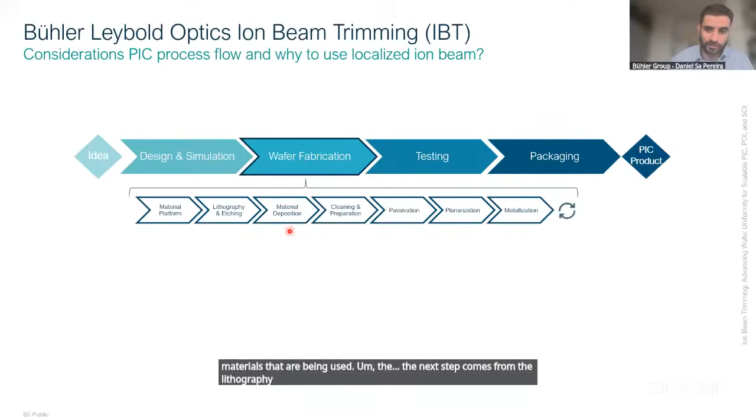The next steps come from the lithography, the material deposition, such as cladding materials for the waveguides themselves to protect the waveguides, cleaning, passivation, planarization, and metallization. This might go through multiple iterations until the actual device is fabricated.

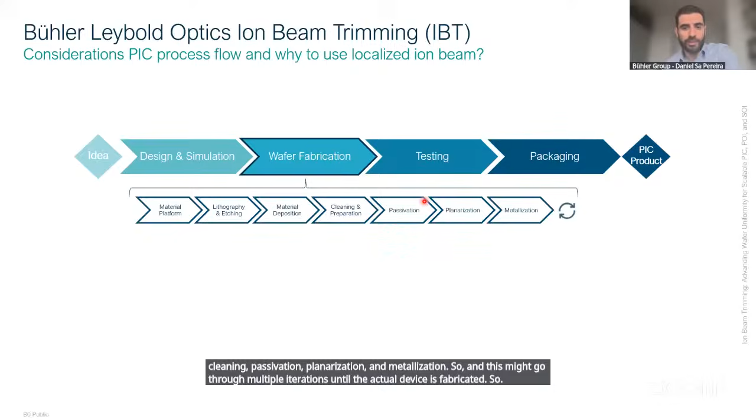So where does ion beam trimming start to play a role? We have here two main points which could be very important, and where ion beam trimming can play a significant advancement in the industry. First of all is uniformity, improving the uniformity of the wafer itself. The second is micro roughness, increasing the smoothness of the walls on the waveguide level.

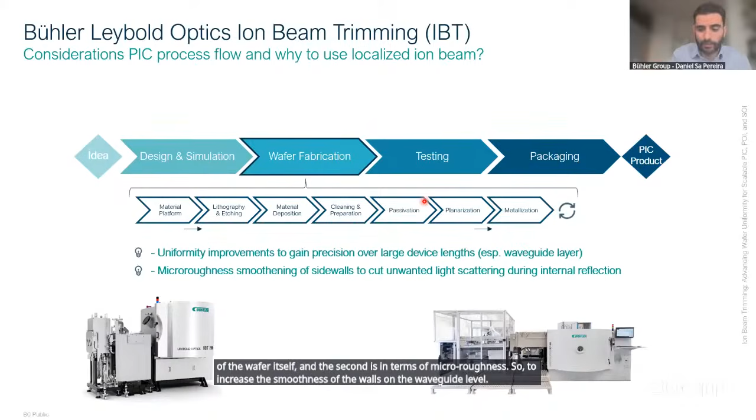This is because the precision of the waveguides and the precision of the thickness is very important, even more so for PICs themselves. So an ion beam trimming step can reduce this total thickness variation even further, to allow that the entire wafer or the entire devices within the wafer are within spec. Basically, the end result is an improvement in the yield of the PIC performance of the PIC platform production.

And this can be applied for different materials, such as silicon nitride, lithium niobate. We also heard a little bit about lithium tantalate. So all of these different materials can be used for post-processing with IBT. It's not that IBT will replace CMP, it's that IBT is a good add-on to a CMP process. Basically, if CMP and IBT work together, one of them can work on the volume removal of the material, whereas the other can do the final planarization.

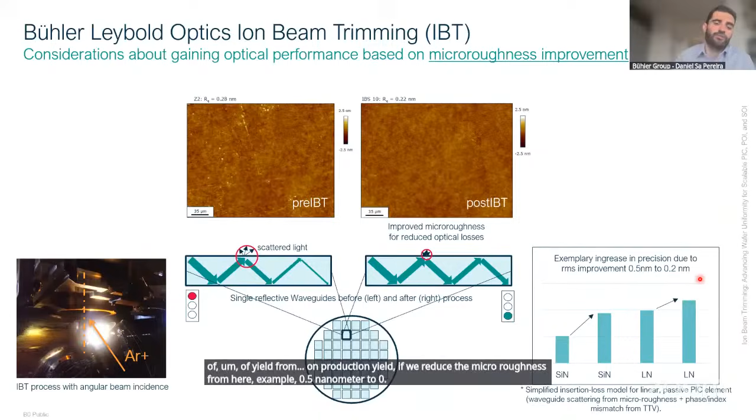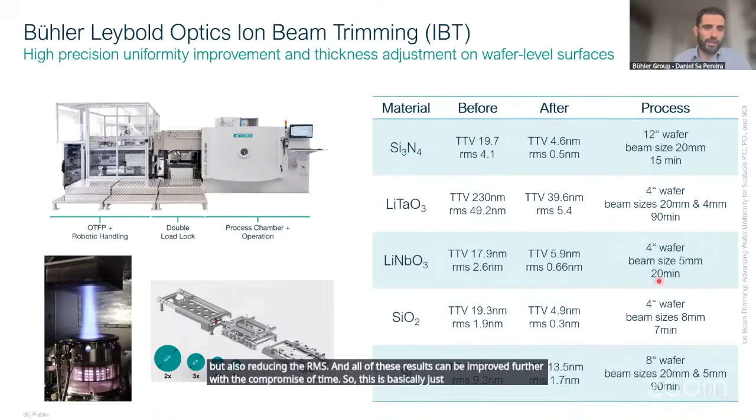It's not just about the end result, but how long it takes to get there. For example, 300 millimeter wafers with a 15-minute process reduce the total thickness variation of silicon nitride from 20 nanometers to about 5, while also reducing the RMS. All these results can be improved further with a compromise of time. This is an example of how ion beam trimming can benefit multiple platforms.

In conclusion, to get to the typical EPIC question: we are looking for partners in the PIC landscape to further test and qualify our ion beam trimming tool. We can offer test tools available in our facility in Leipzig, integrate measurement equipment for before and after ion beam processing, and control in-situ etch rate monitoring. We have a full rounded system that can be developed for R&D and mass production alike to improve the yield of wafer manufacturing.

We are looking to investigate how much further we can improve uniformity and how fast, how to reduce micro roughness further, and of course improve wafer yield. I focused entirely on our ion beam trimming tool, but it's worth mentioning we also have sputtering tools that we're working on in the waveguide field.

In particular, we have a magnetron sputtering tool capable of depositing silicon nitride layers without any hydrogen in the process, which has proven very beneficial for infrared waveguides and could also be very interesting for 1550 nanometer PICs. We developed this with semiconductor applications in mind, meaning low deposition temperature processes. We're looking to investigate topics like propagation loss, and we already have some very interesting preliminary results which I'm happy to share in the meeting. We're also looking into improving fill factor and step coverage of our films, among other topics.

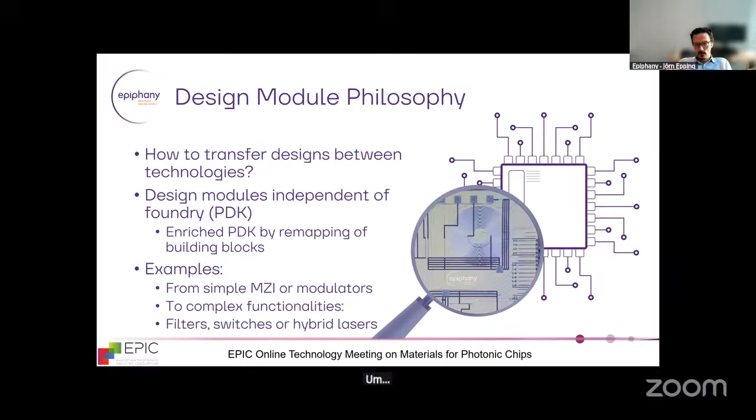What we're currently also commercializing, or having other people evaluate, is the hybrid lasers, where we have an external gain section, because we've seen that most technologies lack active lasing and will need some laser integration. So we made a hybrid laser design module that can easily map onto different technologies, and we're currently testing and validating them.

We have it available for silicon photonics, on silicon nitride. Aluminum oxide is something we are actually looking at also in a project together with Aluvia, but also lithium niobate is very, very interesting for, let's say, the next generation of coherent communication, for example.

And on the other hand, we also have matching to our design module for your foundry, your technology of choice. We'll also have laser chiplets already available, such that you can make one run at the foundry and just take off-the-shelf gain sections that match with it to do validation.

What we'll also have available soon, currently in production, are evaluation modules. So you might be interested in the hybrid lasers we provide that you can put on your designs, but you want to test it. Does it work with my system? Is it reliable? Does it suit you? Then we can already supply you evaluation modules so you know the design you put on your wafer run works for you.

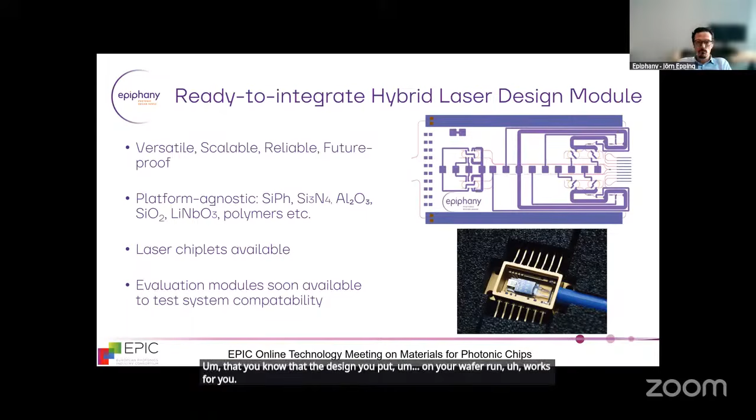And with that, why can we do it, what we do? Because we are mainly a service company, but we have decades of experience going back with our CTO into the early 90s, who already did his first designs and commercialization of integrated photonics technologies before the dot-com era.